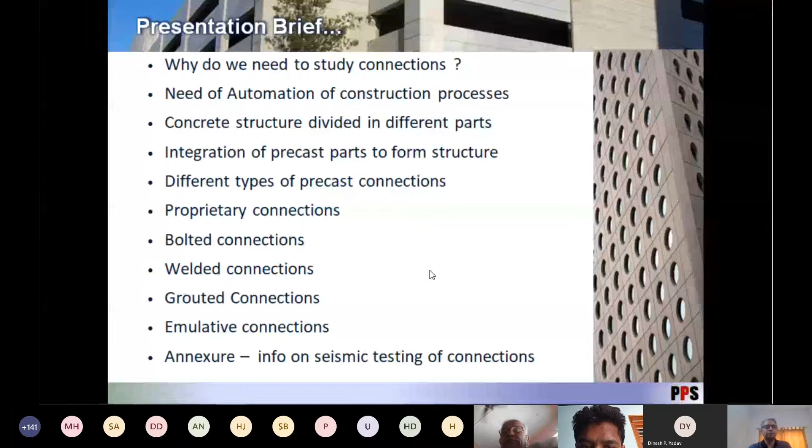This is the first part, like what we were discussing in the beginning: why do we need to study the connections?

If we see, a car is made up of different parts, it's a very well-known example, so I tried to correlate with this, because everybody accepts readily that a car has to be prepared in different parts and then assembled. No single organization can directly create a car, that's a well-known fact. Over this period of 100 years, people have divided the car into different parts and created one assembly line process where all these parts are assembled together, and a car of a special brand comes out of that assembly line production. So in similar fashion, we are dividing this car because it is a very complex product which is very difficult for only one organization to do everything.

Similarly, in case of our building structures, everybody will agree that buildings are also equally complex in nature. Right now, every organization is putting a lot of effort to club all these different aspects together to create a good building structure. The benefits of dividing the building structure into different parts will automatically need some good connections to combine them together once those parts are manufactured at different locations or specialty locations. Some special type of elements will need to be cast separately, say a unit which can cast wall panels, a unit which can cast hollow core slabs, a unit which can cast long line type pre-stressed beams, or a unit which casts precast columns. Assembling all these units together will need some good set of connections, which we are going to study now.

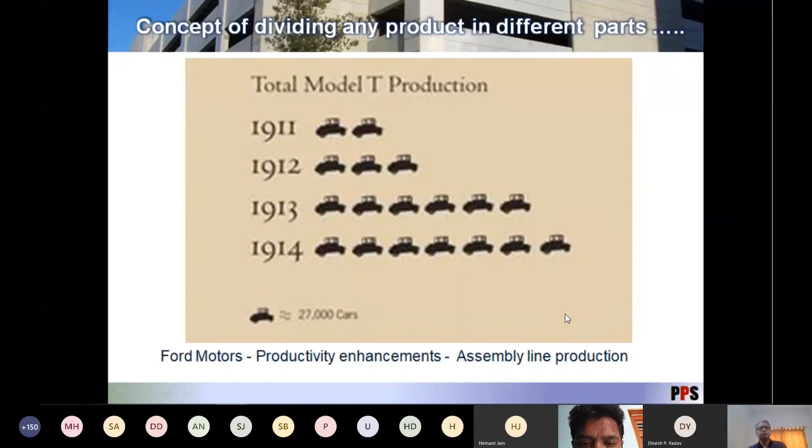So how this goes actually, even in construction, what we have observed mainly is whenever we try to provide any contractor or engineers on site, the obvious choice of a project manager is that they want very skilled manpower. Why skilled manpower? Because in construction, it's not like dealing with only one step.

If we have to do a particular task, we need to complete at least 10 steps. Maybe we can broadly categorize those different steps, and once we complete those 10 steps, that task gets completed. So normally when we deal with low skill workers, they can complete one step, maybe 2 or 3 steps, but completing all 10 steps needs a high skill worker.

And nowadays there is a scarcity of high skill workers. Earlier we used to get very good carpenters and very good masons because they were in that profession right from the beginning. But nowadays, because of changing trades, it's very difficult to get high skilled workers in all the fields for one particular project or building.

So what is the solution in that situation? We should be able to get the work done by low skill workers also. But if we try to give all these 10 steps to a low skill worker, he will definitely fail and will not be able to achieve the final outcome.

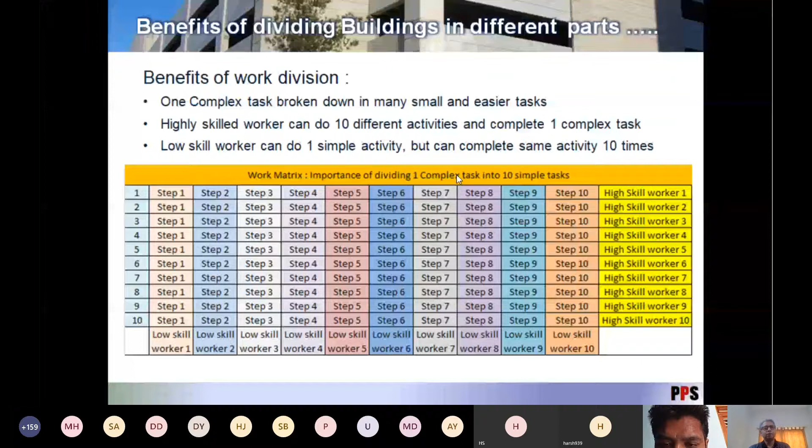Like we also know, in every field we try to do that. In precast, we also try to do that. Everybody need not know everything, because if there are 10 different activities, getting knowledge and expertise in all 10 areas is very difficult. Whereas if we specialize one low skill worker into one special area, then his productivity increases, his output enhances.

So that is how, even in a precast plant, we try to assign different activities. One person is dedicated for mold preparation, another for marking sizes, another for checking the molds, then someone puts the inserts, lifters, and MEP, and then at one station the concreting and curing happens. This way the productivity of low skill workers also gets utilized.

Hello, yes sir, are you able to see this video? Because I am not. Are you able to see the presentation? I am not able to see the red outline. No sir, we are able to see the presentation. Okay fine. No sir, it's not visible, sir. Normally the PPT is not visible, it's all about the internet connection, how it is working. If it's not proper, that is why it may be. Maybe you are using internet via mobile portable hotspot.

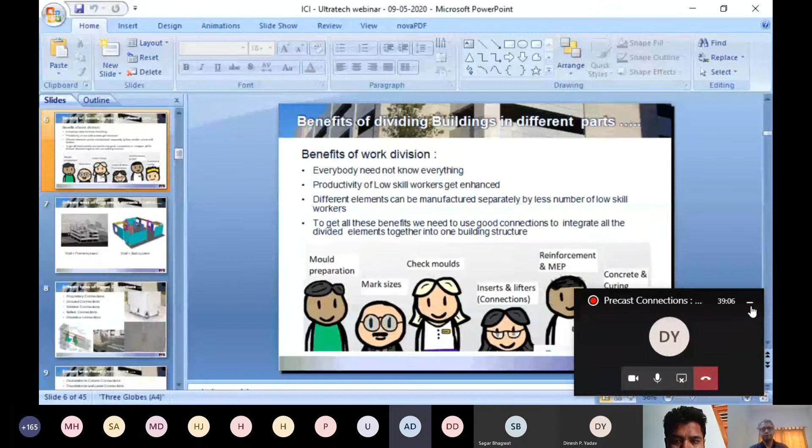So basically, the benefit of dividing work is that everybody need not be specialized in every aspect of the construction process, and we can get the work done with low skilled workers, and then it can be assembled together to make a complete building structure.

Another advantage is that we need not have all the construction activities going on at one place. We can have different construction activities, like different parts getting manufactured at different locations. Some precasting units might have good capability of manufacturing wall panel elements, there could be a different setup for hollow core slabs, and another different setup for column production.

And then all these together can be integrated into one building structure. So there are different structural systems, like how we divide a building structure into different parts. These are broadly categorized, but we can even have some other alternate systems also.

These systems are basically categorized mainly as the wall plus frame system, in which there are structural shear walls. On the left hand side you can see this structure has structural shear walls as well as column-beam frame connections. Sometimes these are moment resisting frame connections, sometimes these are normal gravity connections, and the entire lateral load goes onto the shear walls. So this is one type of system.

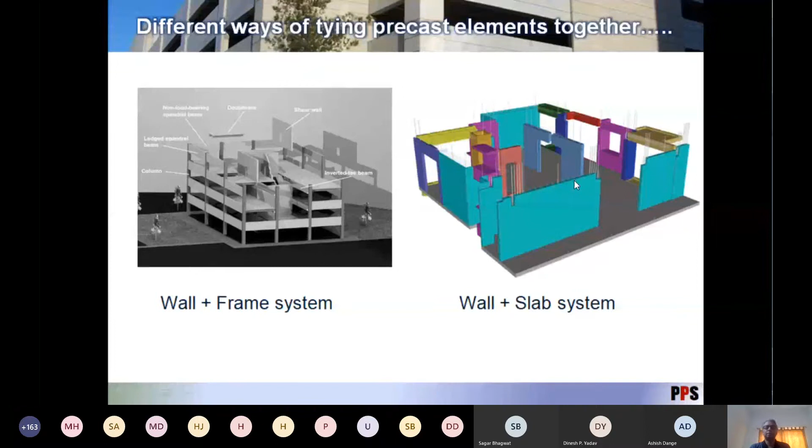If we try to categorize these connections into different categories, it could be some proprietary connections. There are many companies that do a lot of research on the performance of connections, not only from the point of its service life condition, but from the ease of installation, from the ease of getting embedded inside the precast element, and again of course from the service life condition. So all these different types of connections are proprietary connections manufactured by specialists in those connections.

Then there are certain grouted connections wherein we use some sort of sleeves and dowel bars. Can you see this cursor? These are some wall panels which have sleeves embedded inside them, and there are some dowel bars which are protruding out from other type of wall panels. So when these dowel bars are put inside the sleeve and the sleeves are grouted, the connection gets completed.

Similarly, there are welded connections wherein different elements have got different steel parts embedded, either angles or plates, and then with some loose angles or loose plates, these elements are connected together to complete the welded connections. Welded connections need a bit of precise work, because we need to have a different agency for welding on site, and all those welded joints need to be properly checked.

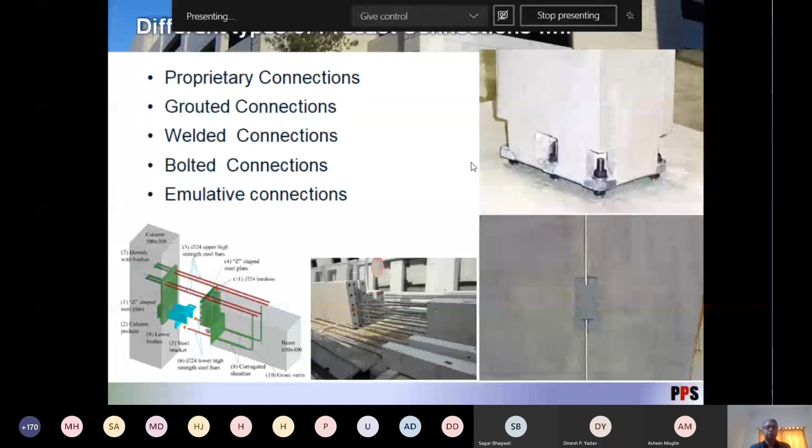These are easier to manufacture, but these are difficult to assemble on site. We need to see the clearances, and we need to have proper tolerances for these elements to get fitted on site.

And then there is another. Hi, hello Dhananjay, Devashish here from Godrej Properties. Hi Devashish. I have a question - among all the types of connections, as of now, which are recognized by Indian standard?

Indian standard specifies... Indian standard has not categorically specified that these proprietary connections are accepted, but all these emulative connections are recognized, and the connections which can be proved by calculations are sufficient to resist the forces at this location. So those connections are accepted, but codes have not specified typically saying these connections are okay.

Like in case of reinforcement continuity connections, there is one code about couplers requirement, and the couplers which satisfy those connections, like Griptec couplers, satisfy Indian codal requirements, so they qualify that codal requirement. But again, that goes into emulative type of connection.

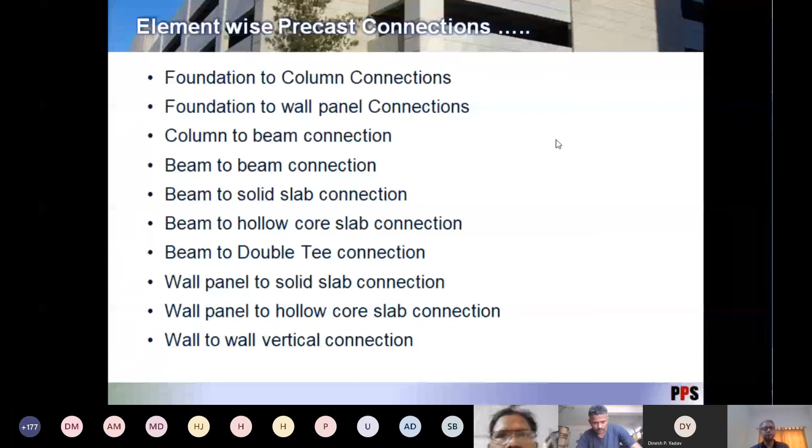So generally people are comfortable classifying the connections in this manner, so we will go like this only. Let us start with the foundation to column connection.

Typically in case of bolted connection, there are templates to be made which can be placed while casting the foundations, so that all these bolts are kept tied to that template, and it ensures that these bolts remain exactly in the same position where they are intended, so that when this precast element, either with these type of column shoes, or...

There are certain base plates in which there are holes kept for bolting of these connections, so either these type of things should exactly get matched with this thing. That is why these type of templates are used. And once these elements are erected in place, then we can always put the bolts and tighten them to complete the connection.

Since there is some space left out at the corners for completing these bolted connections, we can afterwards put some sort of formwork shuttering to complete the bolted connection by pouring the grout, so that these connections don't remain visible. Here is a small video of that, I'll just run that.

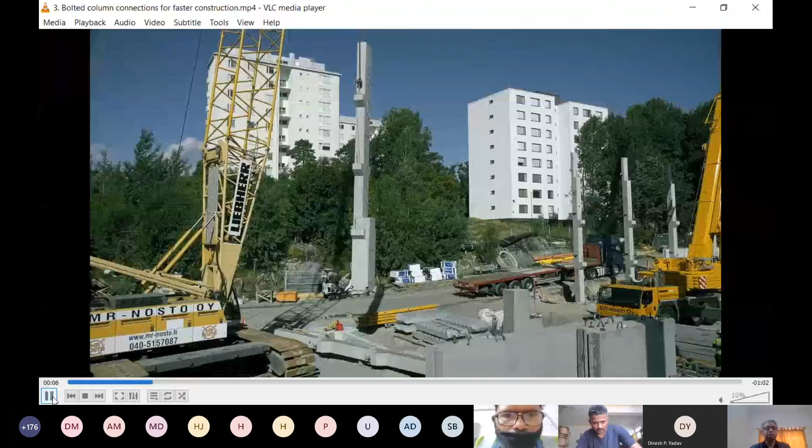This is how the bolted columns look like when they are erected in position. One of the advantages is the speed with which they get erected and the manpower required for erection of these type of things.

There are specialty products available, like Peikko column shoes, which can get embedded inside the column. You can see this column is casted with Peikko column shoes. These shoes typically have got 4 recesses at 4 corners, and then there is a base plate type of thing at the bottom which has got holes from which this bolt can go through, and then it can be tightened like this. Another advantage is it gets installed faster.

At the same time, we don't have to brace it till the time the slab comes on top of this column. So you can see once these columns are installed, they are freestanding. The headache of bracing the columns is also gone.

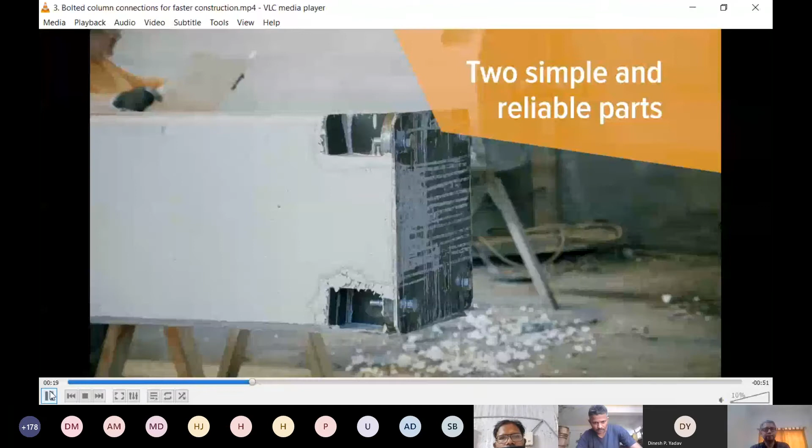This is showing the details of that connection, like how these connections are manufactured. It's like a ready-made product which we insert inside the column at the time of casting, and there are some cavity formers fitted along with this. So after the element gets casted and demolded, we just remove the cavity formers to create this cavity in the columns for making the connections.

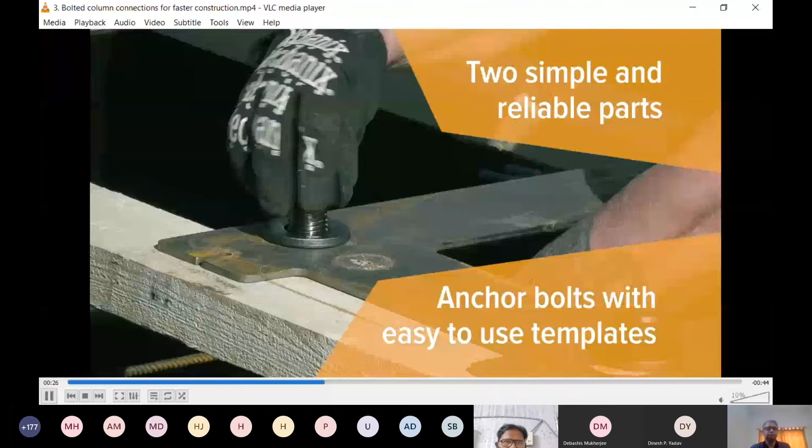There are certain templates to be followed. Here it is shown these templates installed before casting the foundation. Above the level of concreting, cross wooden or steel members are placed on which this template is kept, so the template doesn't shift during the concreting operation, and the bolts remain exactly at the location where they are expected.

So this is how the bolts remain there. The general time required for installing these columns is hardly 10 minutes, which is quite a good time for installation of columns, say a 3-4 storied column.

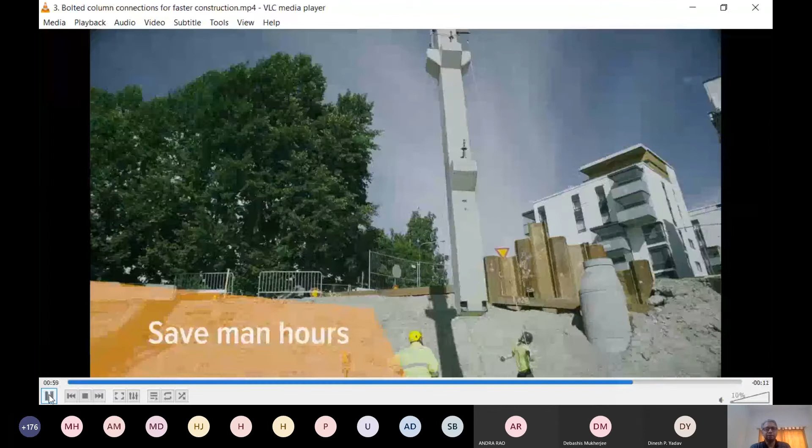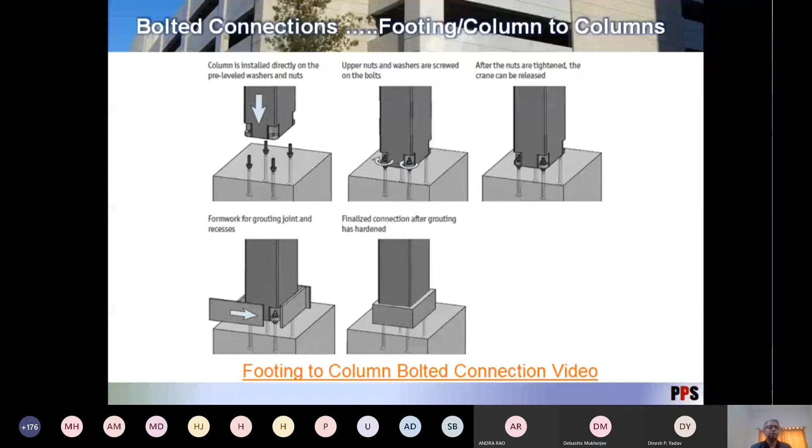Once the columns are ready, installation of beams and other connecting members becomes very easy. The focus of this type of connection is more on saving the man-hours required in erection of the element. So I'm not focusing on the cost part, but the easiness to install those connections and the time saved in achieving those connections at site. Those are also important parameters, and right now nobody has quantified the cost of that. So if we have to do the costing of any connection, these aspects are very important in working out connection cost.

These are some of the benefits you can see in this 3D view. You can see these are the bolts and how they are connected with the base plate to complete the connection. The main advantage is faster installation of columns. We don't need any bracings, which speeds up the construction process. Also, finishing is very easy - we just need to pour grout around it, or pack it with dry pack type applications, in these pockets.

Then there are the same type of connections but with grouted connections. One major disadvantage of grouted connections is we need to have the columns braced till the grout achieves strength. In a grouted connection, we either leave dowel bars coming out from the foundation, and we put sleeves inside the column, or dowel tubes as we call them, for receiving these dowel bars when we erect the column. So once the column is erected, these dowel bars get inside the column, and through these holes we pour a non-shrink grout to make the connection.

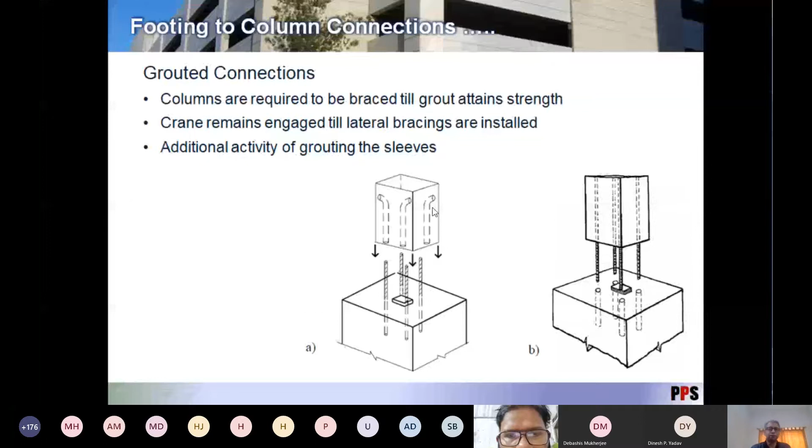They keep these type of pockets inside the foundation, with dowel bars protruding out of the column instead of coming out from the foundation. The advantage is we don't need that much accuracy in casting the foundations, so we can put higher diameter sleeves inside the foundation. While erecting the columns, we need the grouting agency available along with the erection team, because at the time of erection all these pockets need to be grouted first. Once the grout is filled inside the pocket, we erect the columns. So it's possible both ways, but from a functionality point of view, this option is widely used in the Indian context.

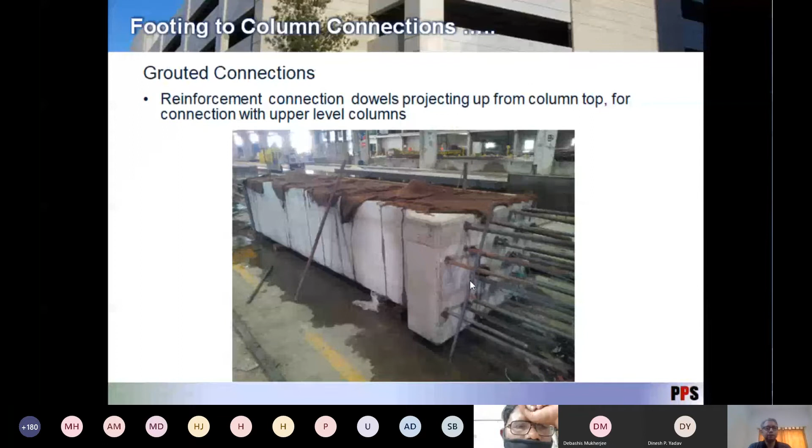These corrugated metal sleeves are at the bottom, where my cursor is pointing right now, and dowel bars are like this. This is a typical type of column cast for grouted connections. Once these columns are installed on site, you can see this is the foundation from where these dowel bars were taken out, and these columns were erected. After erecting the columns, they were braced from the sides like this.

After bracing these columns, the grouting operation was completed. Once the grouting operation of connections was done, upper level columns and hollow core, upper level beams and hollow core slabs were installed. So this is the general procedure of completing this foundation-to-column type of connection.

Then there are different connections available for wall panels also, for precast wall panels getting connected with the foundation. There are certain proprietary connections, like Peikko wall shoes, similar to column shoes. You can see this type of wall shoe, with which there is reinforcement welded to get embedded inside the wall cage. I'll just run one video about this.

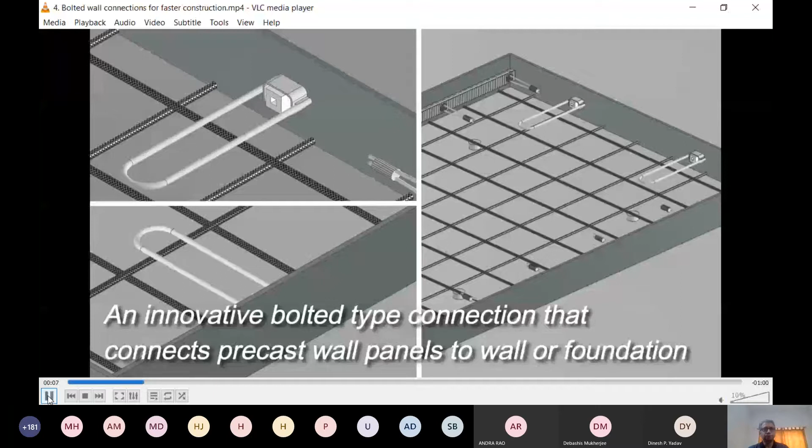This is how, while casting any precast panel, these type of wall shoes are placed here, and there are certain pocket formers which we need to install there, so that during the concreting operation we get some empty space, which can be used for tightening of the bolts. So these pocket formers are placed, and then bolted to the mold.

Once this is bolted, we can put up the reinforcement, and when everything is done, these elements can be shifted to site, and whatever pocket formers we had put are removed for tightening of the bolts. So now once we remove these pocket formers and we shift this wall panel to site...

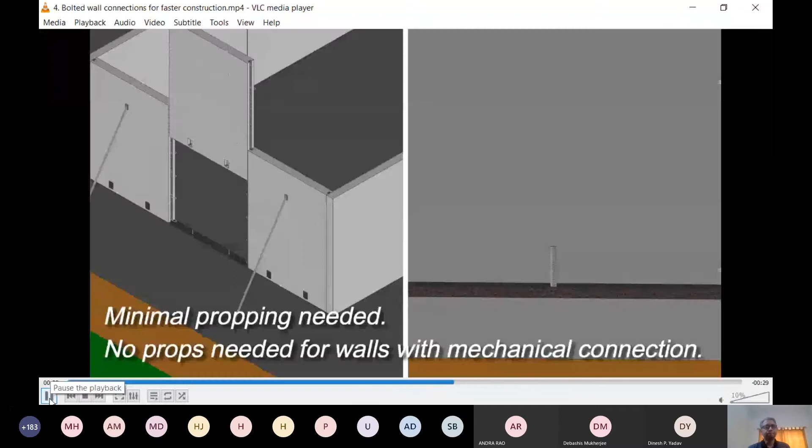After installation of this wall panel at site, we need to provide some sort of lateral support for stability of this wall panel until the slab elements are erected on these wall panels. Once these wall panels are aligned, we just bolt them to finalize the connection. So once the bolting operation is done, the connection is finalized.

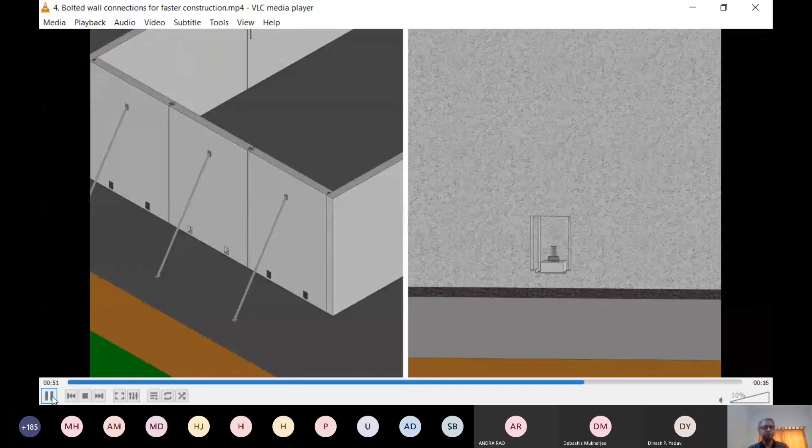Then either we can just use some dry pack grout to finish the connection so that it doesn't remain visible from outside. So this way we don't have to depend on the grouting operation. The connection becomes very fast.

Once we install the wall panel, similar to columns, like the bolted columns that were getting installed within 10 minutes, the same thing we can expect for wall panels also. Here we just need to make 2 connections, so 5 to 10 minutes is good enough for installation of one wall panel.

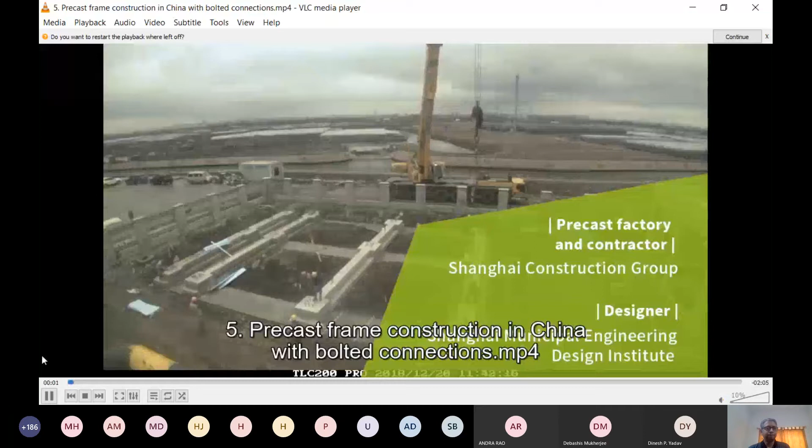Using these type of bolted connections, in China they did an experiment where they monitored the erection time of one precast building, and observed that within 12 days only 8 workers could finish that G+1 type of building. This is a video of that. This building was done using all Peikko connections.

You can see this building was having precast elements like foundations, columns, beams, and facade panels, and everything was done using proprietary connections like Peikko. Here's one important point: if the site is very tightly placed and we don't have sufficient...

...storage place available and we go for these type of proprietary connections, in that case, even without any proper storage, we can directly install. You can see here the trailer is standing here, and they are just picking all these elements directly from the trailer and installing on site.

So we don't need to have proper storage place. It reduces the handling of elements also. Elements can be directly taken from the trailer and installed on site.

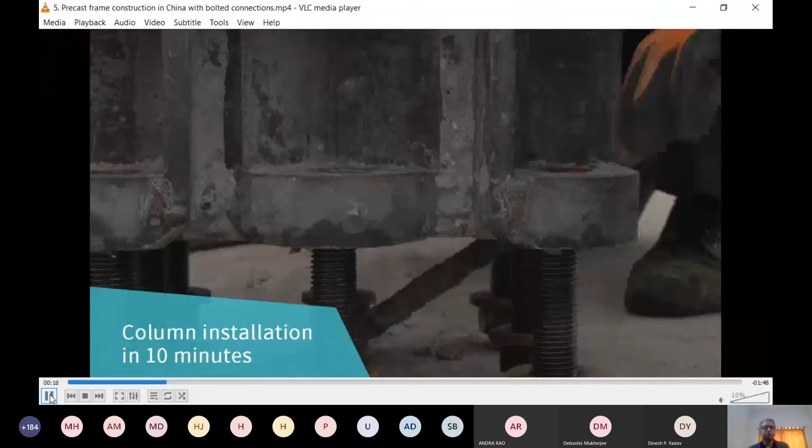And here they have given the timeline, like when the installation process started, and on a CCTV camera they recorded how much time was required for completing the building. Here also the column installation was getting completed within 10 minutes, each column getting installed.

So even the trailer could also wait for that much time because installation is very fast. So it doesn't need to get unloaded. Almost the similar time which is needed for unloading a trailer, in almost the same time these elements were getting erected on site.

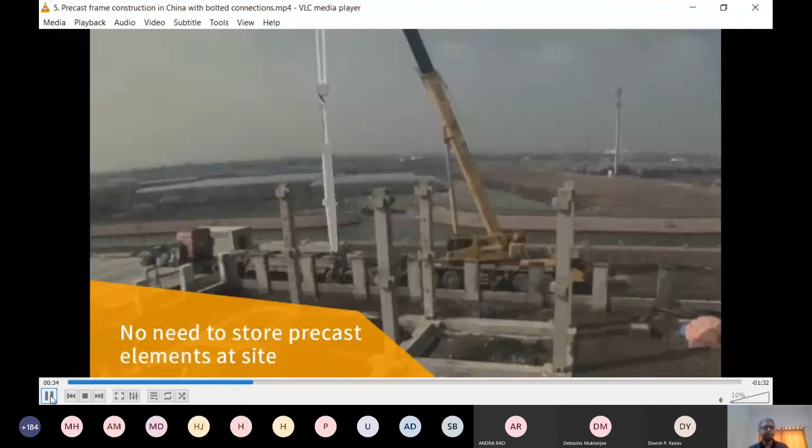So this way, even the crane time also gets saved. In this case, almost 60% of crane time was saved. So if we try to load that time onto the cost of connections, probably that would work out cheaper.

And this is how the other activities are going on. Now they are putting up beams on these corbels.

Since they had used these type of column shoes, they don't need to brace the column temporarily, so they get a lot of working space there, and it increases the efficiency of the workers who are working on site.

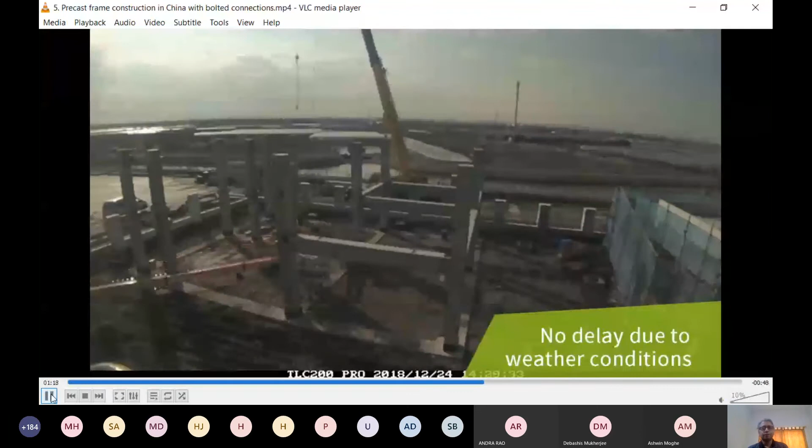And even in any type of weather, these type of connections can be installed. So you can see this first floor is getting completed within hardly 4 to 5 days. There are certain proprietary connections of corbels also, wherein they have got steel corbels put inside the beams for easy installation of the beams. And now the installation of roof slab.

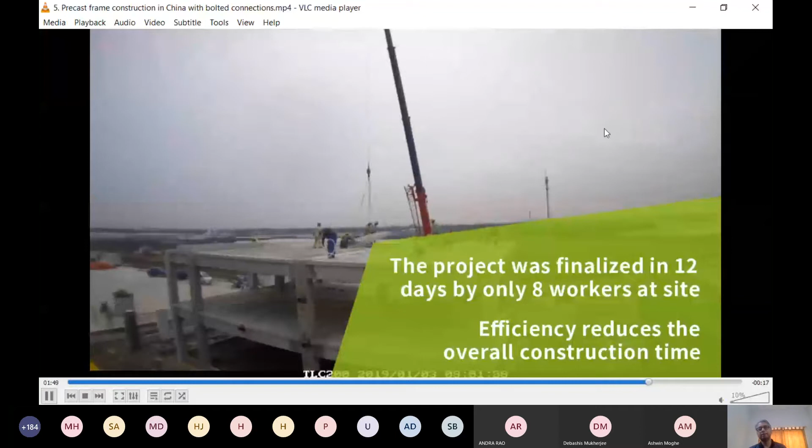So basically they finished installation of all these elements, a G+1 structure building, within 12 days. And if we consider the overheads of site staff and overheads of the cranes and other equipment which get engaged in execution of project, this is one of the very good achievements of bolted connections.

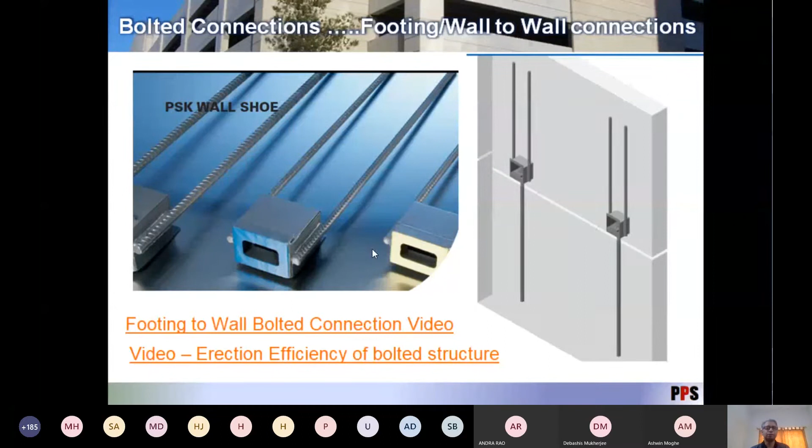Only thing is that while casting these elements, we need to be very precise about the placement of these wall shoes or column shoes, and at the same time at the foundation level also we need to use proper templates to keep the bolts in exact position. That was about the bolted connections. Now we look at the grouted type of connections.

These are commonly used connections at present in India, either a single dowel connection of wall panel, wherein the wall panel has got these type of corrugated metal sleeves and dowel bars are coming out of the foundation walls, stub walls normally we call it. Generally the foundation as well as wall up to ground level, up to the grade slab level, that is done in RCC, so that we can easily align all these dowels which come out of the wall panel, and we get one plain surface for these wall panels to get erected on site.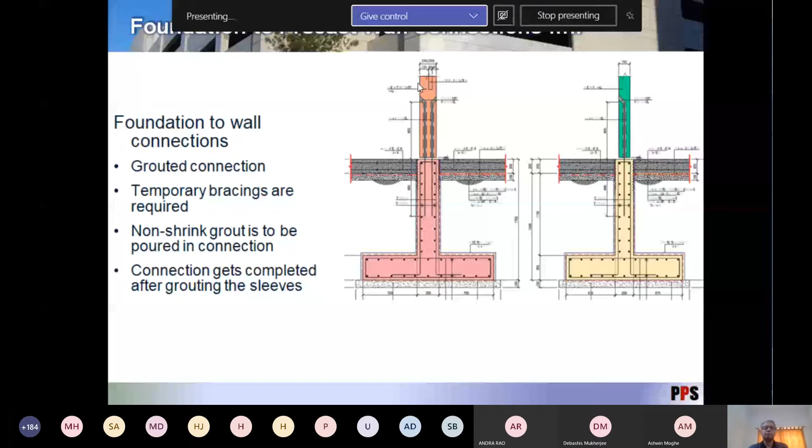So these are called grouted connections because once these dowel bars go inside the corrugated metal sleeves, we pour the non-shrink grout to complete these connections. And we need to provide some temporary bracings to these wall panels till the time the slab elements get erected.

So again, in this case, we need to brace these wall panels the moment they are installed on site. Plus, we need a lot of manpower on site to install these dowel bars, because we need to get all these dowel bars inside the corrugated metal sleeves before lowering these wall panels down. And after the wall panel is erected in position, we align it using push-pull props and then grout the connections.

Now we come to column beam type of connections. These are the general type of column beam connections used in precast. The column beam connections typically have these type of corbels for erection purpose. Many times they are used even for transferring the service load also, like in this case.

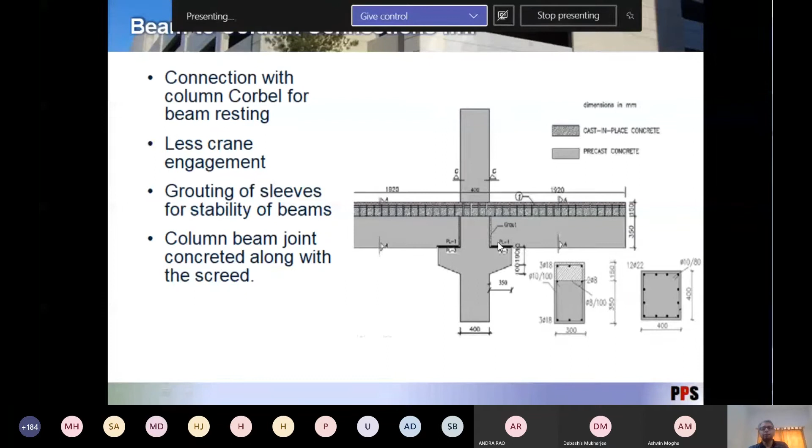But in this type of connection, what we have done is we have taken these beam bottom bars inside the column. So these beam bottom bars also get developed, and inside the screed we put some extra top reinforcement, so we get perfect moment connections here.

So here the purpose of these corbels was to provide basically stability to these beams during erection and avoid the propping of these beams.

Then there are connections like some temporary corbels which are provided like this. You can see this is a steel corbel. This is another steel corbel which is provided below the beam, and these steel corbels are permanent because they are supporting the hollow core slabs in this direction.

This is again one of the tower projects which we are doing in Qatar. There they wanted to have quite higher space available below the beam bottom, so corbels were not allowed from an architectural point of view.

So we provided these type of temporary corbels there in structural steel, and once these beams are installed and the screeding operation is done, then these corbels would be taken out, because the main load transfer is happening through the reinforcement which goes inside the column from these beams.

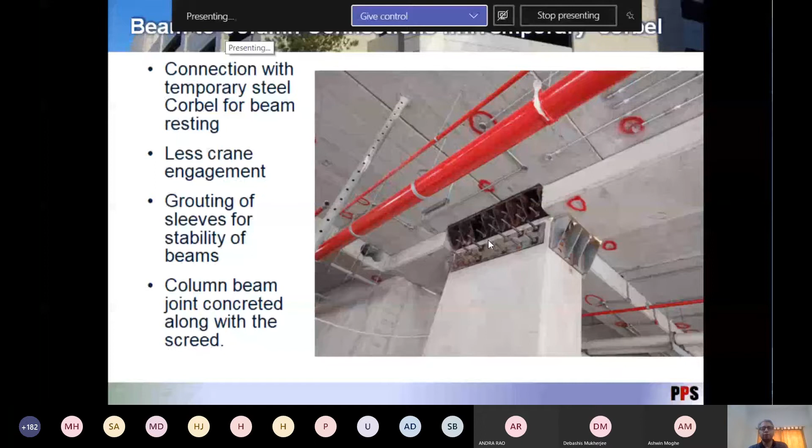And there are certain proprietary connections in this case, but these type of connections are called invisible connections. Normally Halfen-Movement provide these type of invisible connections. The beauty of these connections is that we don't need any type of corbel, either temporary or permanent, coming out from the column to rest the beam.

But another issue is the limitation of this connection: it can only be used as a pin connection. It cannot transfer any moment, because you can see this knife where my arrow is pointing right now. This knife goes inside the column where there is a steel unit placed for receiving this knife. So it mainly transfers only the shear force of this beam into the column. It cannot transfer the moment. So this is called a shear connection.

The advantage again is very less crane engagement. Once the element is lowered into position, we can just pull out the knife which goes inside this column unit. So this happens very quickly, the pinned connection.

This can be specifically very useful in case of circular columns, where we have to connect the beams to the circular columns, and obviously we can't have any type of corbels coming out of a circular column. One reason is that it looks very ugly, another is that the mold becomes very complicated, having a circular shaped column mold plus a corbel coming out of it.

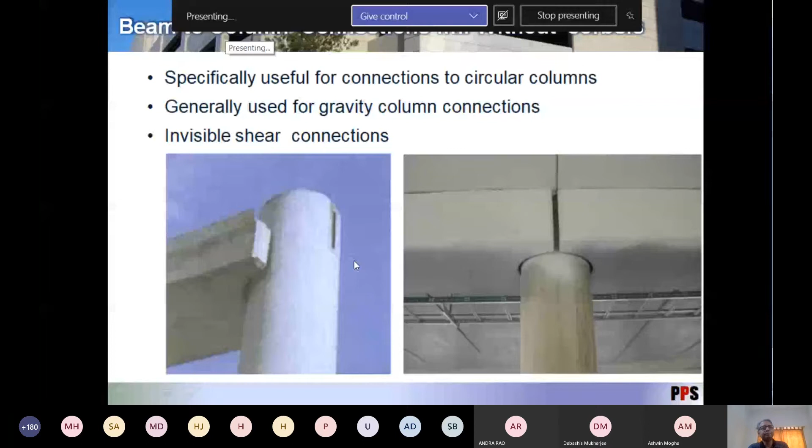Similarly, another pain area in case of precast beam connections is the beam to beam connection. Doing a beam to beam connection is very easy in case of RC members, because we can just take reinforcement of the secondary beam inside the main beam and cast everything together. But when it comes to a precast beam, we need some load transfer mechanism.

Suddenly this thing has disappeared. Is this presentation visible to everybody? That border is not available now. No sir, hello, we are not able to see the presentation. I'll just share it again. I think something happened, and probably somebody else has started presenting something. Can I start this sharing again? Yes sir, yes you can. Okay.

In case of precast beam to beam connection, the main pain area is the corbels, because the beam itself has a very lesser depth, maybe 450 to 500, sometimes 600. So to make a corbel which can take the entire load of the beam, generally loads could be in the range of 10 tons to 50 tons, anything depending on the span. Having that strong corbel which can take up the load of this beam, again this beam also needs to have some corbel. So it becomes a very tedious connection to execute on site. That is why we generally try to avoid beam to beam connections in precast.

But if we use these type of invisible connections, then it becomes very easy to install these things. We can have this knife going inside the beam, and then this connection gets completed very easily. These type of connections can even transfer a shear of around 70 metric ton, which is a very good amount. So mostly it covers almost all types of beam applications in residential and commercial buildings.

Similarly, it is very useful in case of double height or triple height atriums. You can see here these are open frames in an atrium. If we try to put any type of visible connections here, like corbels or any other stuff, then it becomes very difficult to camouflage that with some sort of false ceiling or molding. So it's better to have these type of connections in aesthetically important areas like architectural atriums or those type of situations.

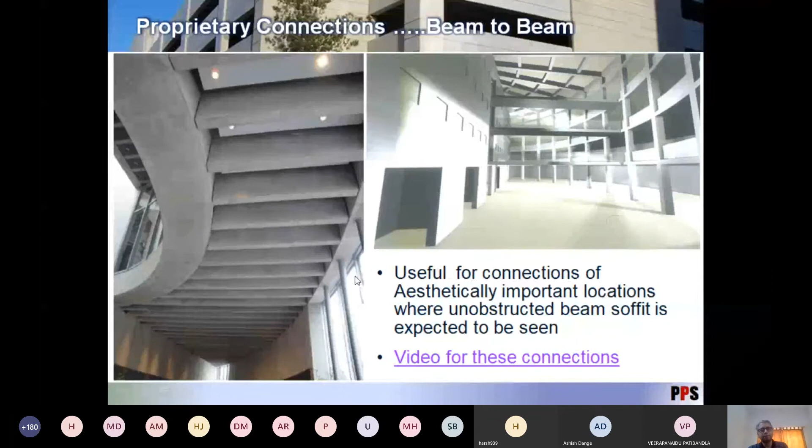Here you can see this is a sort of curved element, and these beams are getting connected using these type of invisible connections. So there is a short video about how these connections get executed on site.

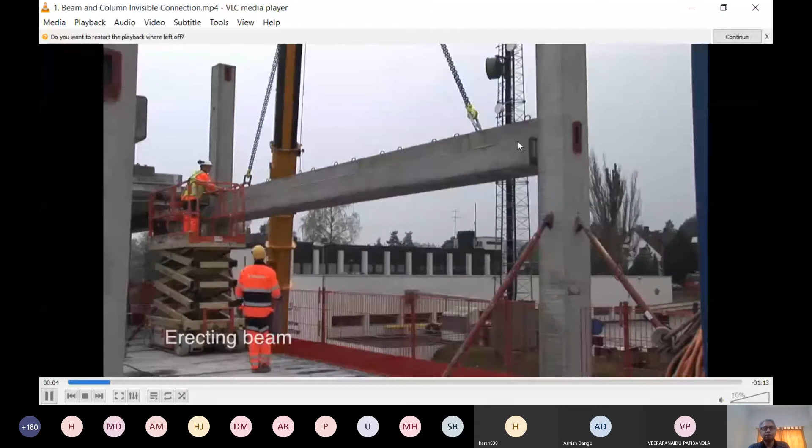You can see this is a beam element which has got that type of knife here, and this is how that knife is taken out. There is some locking mechanism with which this knife is held, and it is ensured that this is fully taken out and the connection is done.

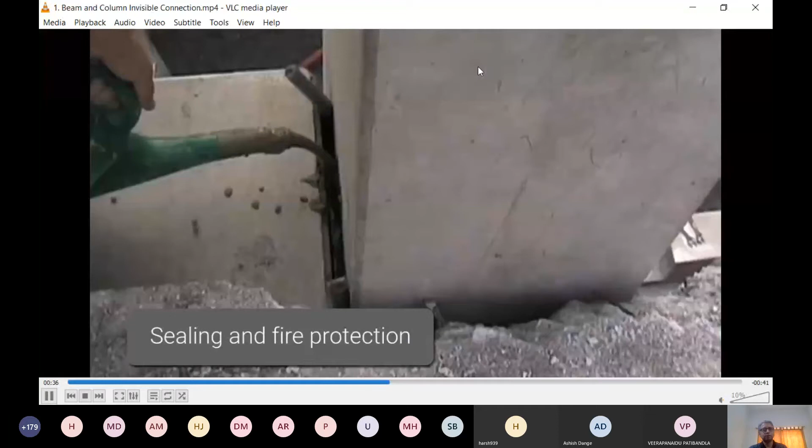Some temporary propping is required till the time this connection activity gets completed. Once that is done, this is required for a sort of fire protection, so they put some backer rod and grout it afterwards so that it doesn't remain exposed to fire.

This is how the connection happens. This is a main beam and this is a secondary beam getting rested on that. The main beam has this type of receiving element, whereas this secondary beam has the knife which goes inside that, and this is how the connection gets completed.

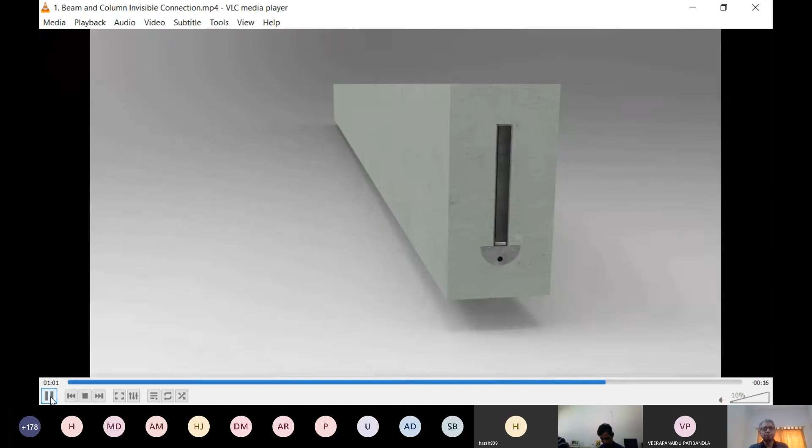Similarly, for any type of beam to beam joint, these type of connections can be used. So this is how these proprietary invisible connections work.

These are the conventional connections I was talking about, like this is the main beam and this is a secondary beam which rests on it. So basically we need to take out corbels from both sides, the main beam also needs to have a corbel as well as the secondary beam also needs to have a corbel. You can see the complicated reinforcement arrangement that goes inside both the corbels. So it becomes very difficult even for the production team to have these type of complicated corbel connections manufactured.

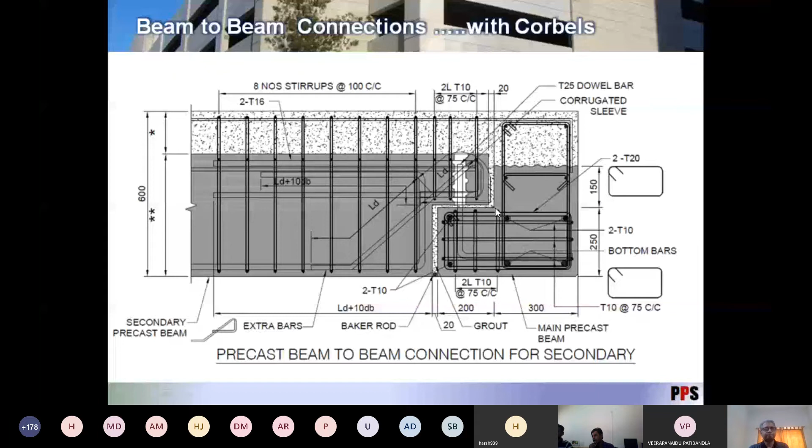One of the important aspects in this is the propping arrangement. If we are able to provide a bearing of a precast element on a beam element or a wall panel element of around 40 mm, then we can avoid the temporary propping; otherwise we need to provide some propping here till the time the screeding operation is completed.

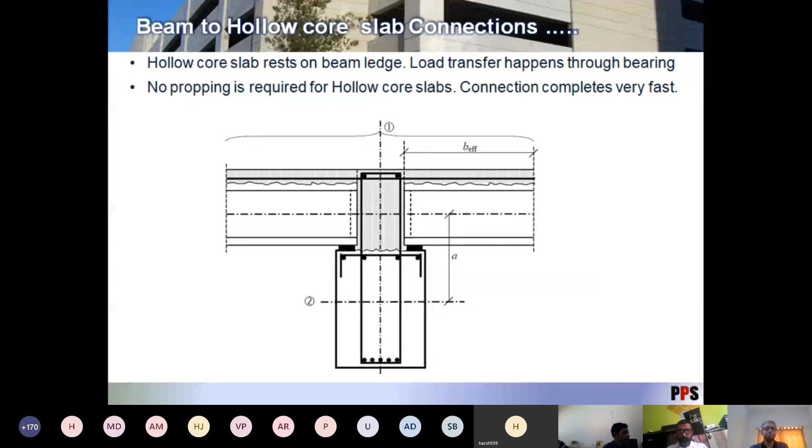The advantage of hollow core slab is that it can span longer distances. It doesn't need any type of propping, and installation becomes very fast compared to solid slabs, because there are standard clamps available for lifting and placing these hollow core slabs. So as of now in slabs, the speed of installation is always highest in case of hollow core slabs.

There is another type of floor element. As we saw, solid slabs are used for smaller spans, hollow core slabs for comparatively larger spans. And in case of very open structures like parking garages, typically in the US a parking garage has a span of around 60 feet, a standard span.

So for that, these double T elements are used, and the connection of these double T elements is like this. This is an inverted T-beam, having these bearing strips or bearing pads kept on the ledges of the inverted T-beam. These double T elements, the stem of the double T either directly sits on it, or if there is a height constraint or the beam depth is not that high, then we provide a small dap at the end of the double T like this. You can see here a dap inside this double T, and this part rests on the ledge of the inverted T beam.

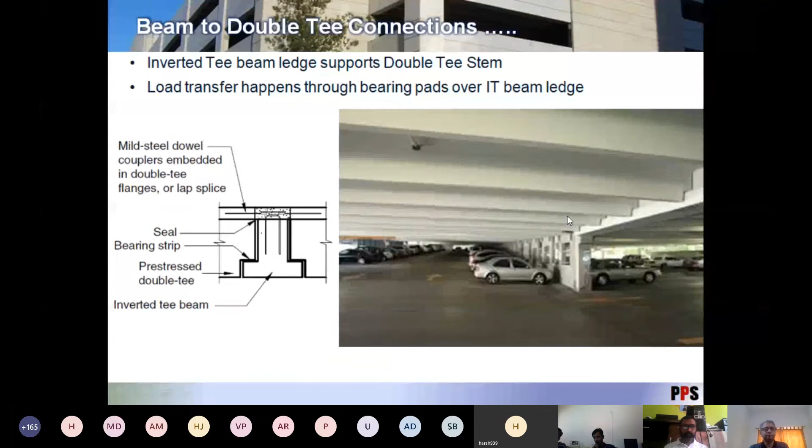These are some of the photographs of one project where we have used double T slabs. You can see here the column to column span was 15 meters, and these were the IT beams, and these double T's were directly resting on the IT beams, the ledges of IT beams. The size of double T element was something 3.5 meter by 15 meter.

So the erection speed was very fast, and in fact it can even take very high loads. These double T's were designed for 15 meter span with a total load including dead load plus live load of 7 kilonewton per meter square.

Shapoorji was the contractor who used these type of connections for resting these double T's. They provided these bearing pads on the contact area on the ledge of these beams, and then the double T's were put on top of that.

So the advantage Shapoorji got in this project was, for the 16 lakh square foot development, they could complete the structural part within 10 months time period. This happened because of the fast connections of double T's and inverted T beams.

Even in this, another project, we have used double T's. This is a data center project where typically the loadings are very high as compared to normal loading. Normal loading in a residential building is somewhere around 2 kilonewton per meter square, whereas in data centers it is 15 kilonewton per meter square.

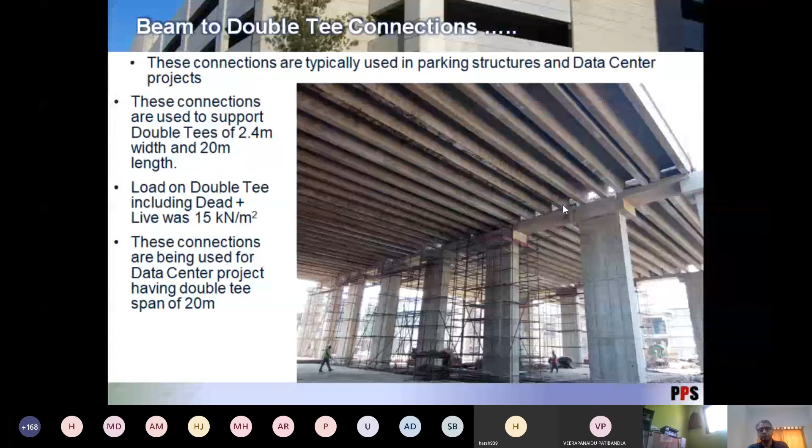Now, apart from floor, there are other important elements like staircase. Staircase is generally one of the major headaches when it comes to construction of any building, be it in any technology, whether RC, structural steel, or precast. The main issue is about the geometry of the staircase, because nothing is in one place.

So obviously, if you have to put some shuttering or make some formwork, everything becomes very critical. The same thing happens in case of precast also, because there are very odd shaped elements, and these odd shaped elements get connected in a very odd fashion.

So the typical connection is to have a sort of corbel inside the walls to rest these landing slabs. But with a corbel coming out of a beam, the reinforcement arrangement becomes very difficult. So the production of that element becomes very difficult, and it doesn't look very good aesthetically either.

So these are some telescopic type of connections similar to what we have seen in the earlier invisible connections. These are TSS type connectors which we place in landings or in flights, which can go inside the pockets in wall panels. There is a small video, I'll just run it.

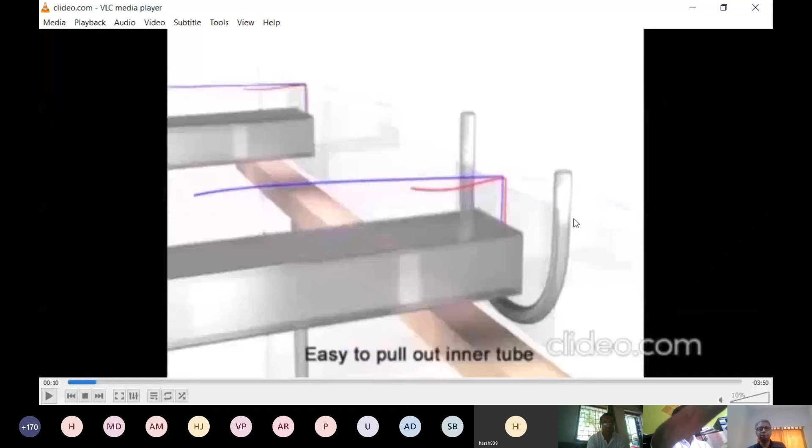Here the purpose of this backer rod is that this part gets embedded inside a precast slab, the landing slab, and this telescopic part comes out of it. So to have fire protection done on this telescopic part which would be visible, we need to grout that part. These backer rods are put in place for easing that grouting operation.

You can see once this element is placed in position, this type of telescopic connection is taken out, and afterwards it is locked by a safety bolt. Once this is put in place, we can do the grouting operation for completing the connection.

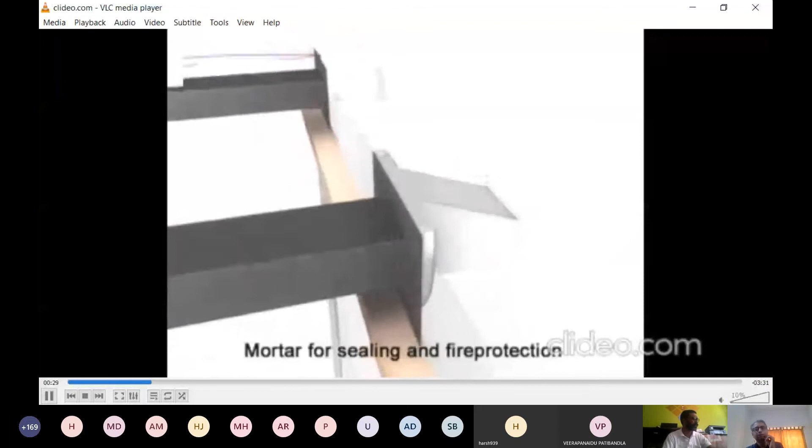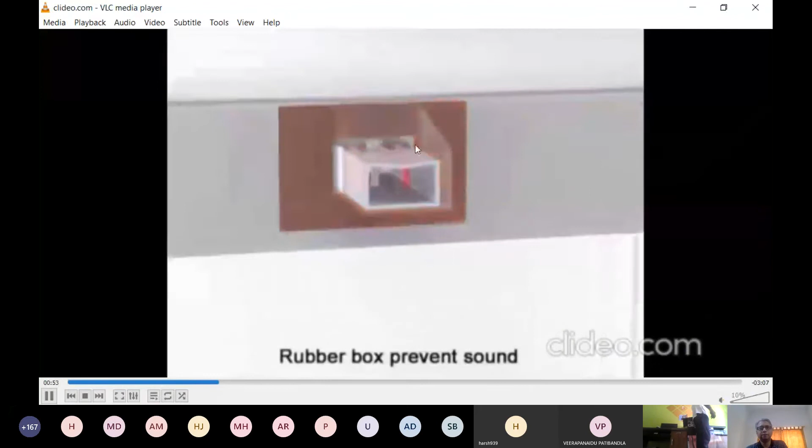The advantage of this type of connection is we can even make these connections such that the vibrations of the staircase don't get transferred to the supporting walls. These are hidden connections, and we can put a rubber type of pad here, a shock absorbing pad on the sides of these connections, so that even if there are shocks...

Typically when people start using the staircases, there are some noises which are heard by people on the other side of the wall. So these type of connections help with that.

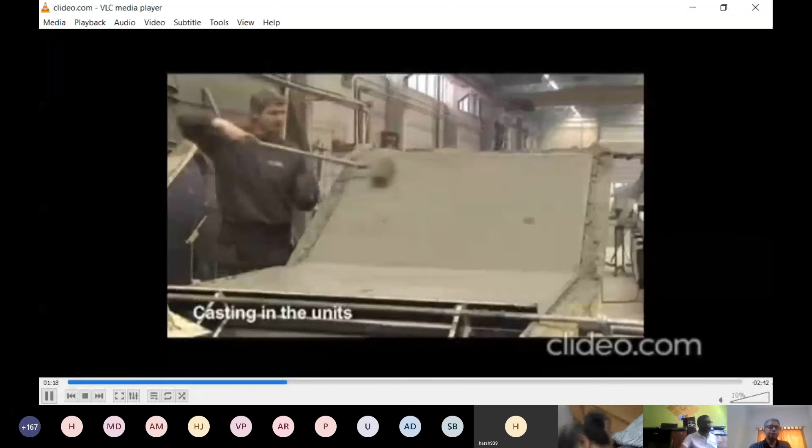This is how the casting operation happens, these connections are getting cast inside. This is some video about how these connections are executed on site.

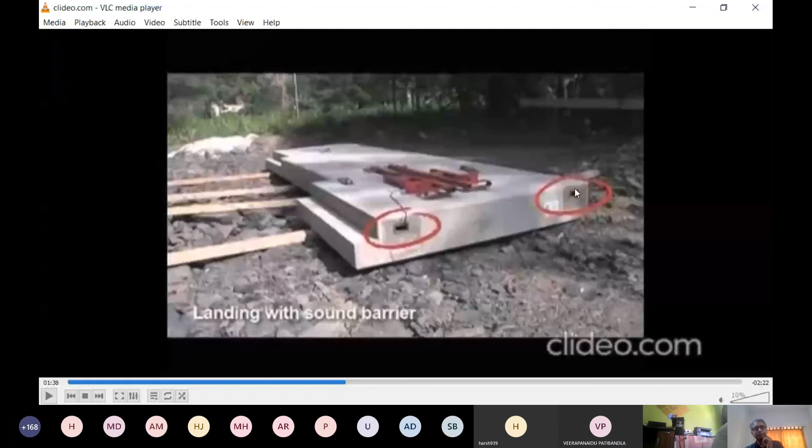Now let us see the installation part of it. This is that landing slab, and here these connections are embedded inside the landing. Once this landing is lowered down, we can take out these connections like this, put the safety bolt, and the connection would get over.

This is how the pockets need to be formed in the supporting wall. And now they are lifting this mid landing part.

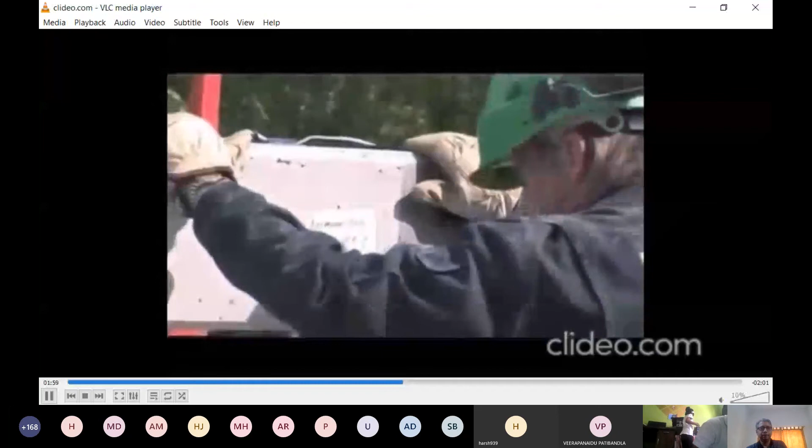Mid landing can be a separate element, or it can be attached with the stair flight. This depends on the type of form used for casting the staircase.

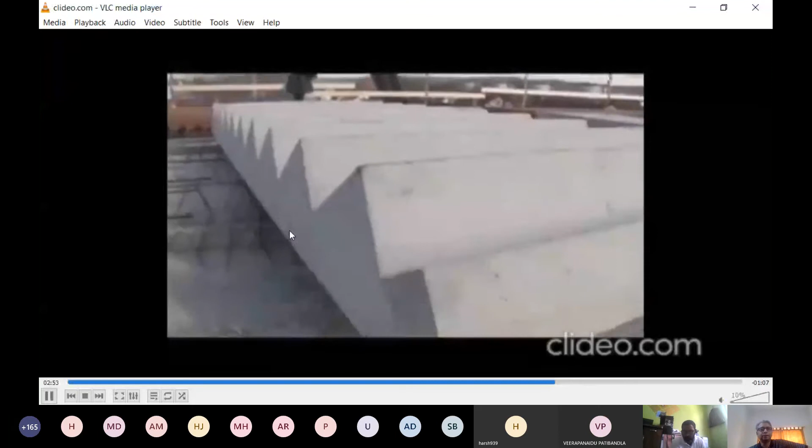Here the mid landing is kept in position, and now they are inserting the backer rods for the grouting operation after the connection is placed. Now they are going to put this safety bolt in position, and they are putting the free flow grout inside this connection. So now this grouting operation is completed. This is how this type of connection can be done.

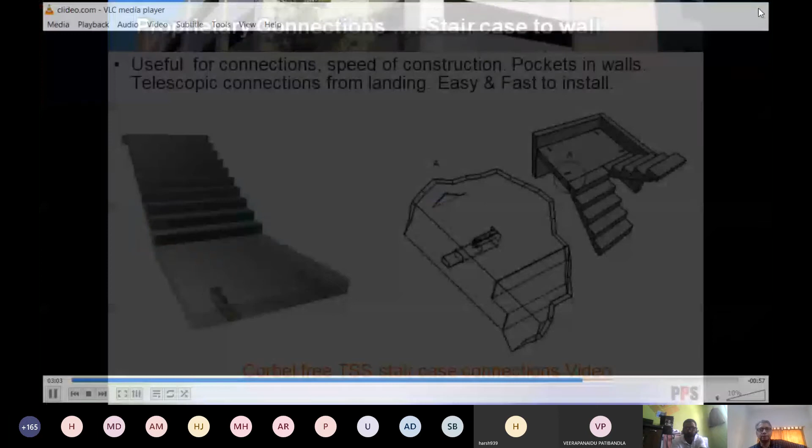This is the same thing which is going to repeat again, so I'll just close this video. This is how these telescopic connections can be used in staircases to avoid any type of corbels.

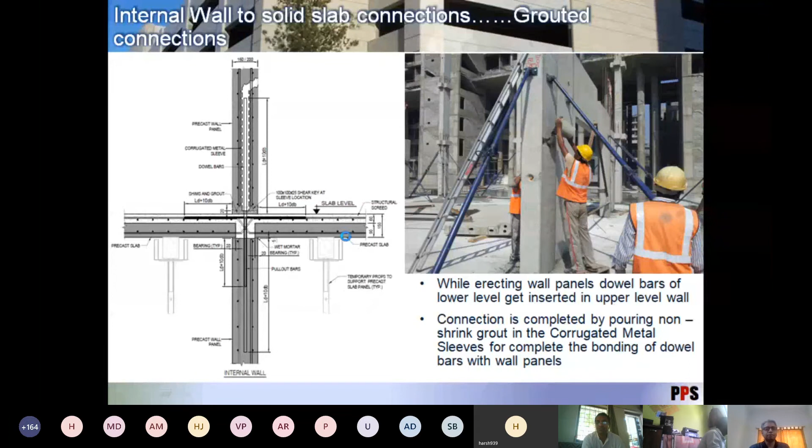This is a case of some internal wall panels where the slab is from both sides. Here we can restrict the wall panel up to the bottom of this slab, but in case of an edge wall panel, for this connection to look better from the external face, we have to take the mold face up to the top of the slab level, top of the screed slab level, so that we can put some backer rod and sealant here to finish this connection. Otherwise, if we stop the wall panel here, we'll see this entire RC band visible from outside, which may not look good.

So here again the same procedure - the only difference is this ledge, which we take up to the slab height. Rest of the things are the same: upper level wall panels are made in position using push-pull props, and once they are aligned, we pour the non-shrink grout to complete this connection.

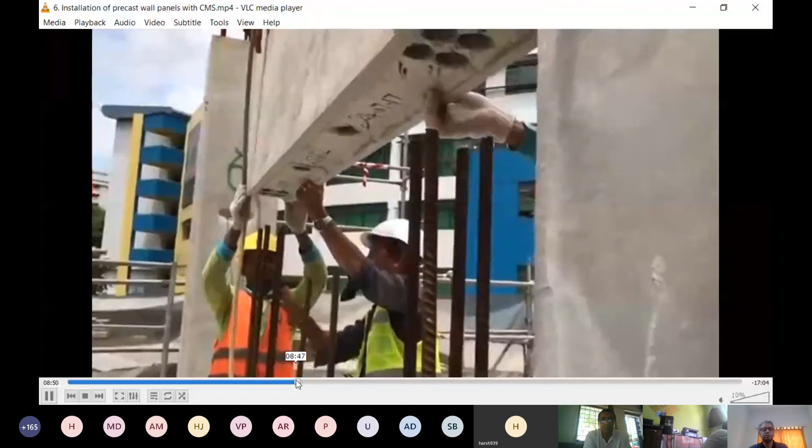From this clip also you can visualize that these type of connections take a long time. They have taken around more than 5-6 minutes just to take the wall panel in position. Now they are lowering the wall panel, but then they realize that some dowels are not aligned, so they will have to align those dowel bars to sleeves so that this connection can be made. You can see the amount of manpower required for establishing this connection - it's like man-to-man marking. Every dowel bar needs to be aligned properly to ensure it goes inside the sleeve.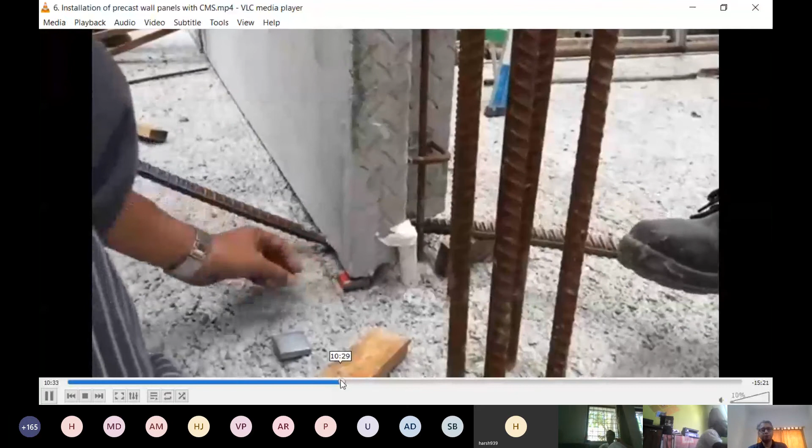You can see once the wall panel is erected, they have to put shims in place. In case of low-rise buildings, we can use shims made of plastic or any other material, but in case of high-rise buildings, we emphasize providing steel shims so there should not be any voids formed inside the wall panels. Once these shims are placed, they have to align it a bit to ensure the plumb and verticality of the wall panels.

Once that operation is done, they install these type of sockets - a threaded socket gets installed inside the wall for fixing the props in position. Many times these people don't have a rebar locator with them, so they do some trial and error - they try to put this thing at one location, and if they hit a reinforcement bar, they shift the location. Once the socket gets installed, they tighten these push-pull props there.

So this is at the top end that the push-pull prop is tightened. Similarly, at the bottom on the slab, they are tightening these push-pull props by having those threaded sockets inserted inside the slabs.

Once these push-pull props are secured in position, they do the aligning part of it by adjusting this push-pull prop. They can align the wall panel. So now they are doing some alignment part of it, verticality checking.

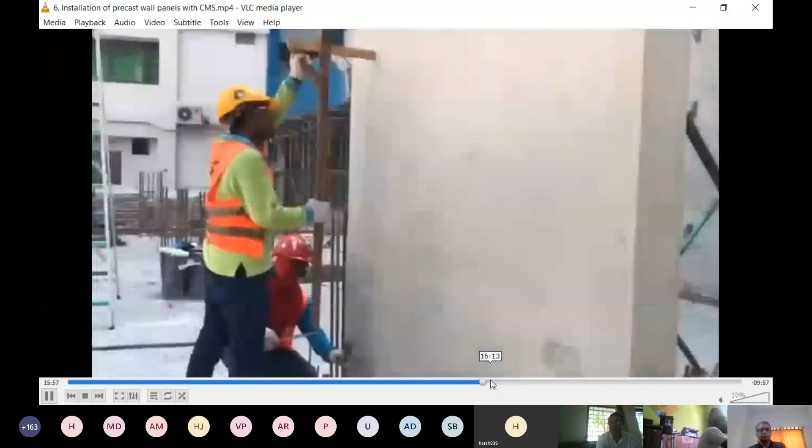There are different methods, like here they are using this type of alignment method. Nowadays they do it using total station. One person stands aside here and points at 2-3 different points of a wall, and guides them to bring it forward or backward by 3-4 mm, and then it's done.

This is how once the wall is ensured in position, they just remove the clutches of the crane. So the crane engagement time is quite high in this case, as the crane has to hold the wall till the time these sides get properly braced.

Then this is how they block the bottom part using a dry pack type of thing, so that during the grouting operation, grout doesn't flow out. And these are the grout holes from where now they are preparing for the grouting operation.

Here they are going to provide the grout, non-shrink grout. Nowadays in India also there are almost all types of grouts available. Like Ultratech also has got grouts like Power Grout, NS1, NS2. Similarly, Conbextra GP2 is there, Sika Grout 214 is there.

So these type of premix grouts are poured from top, and once the holes are completely filled up with grout, they just remove those things.

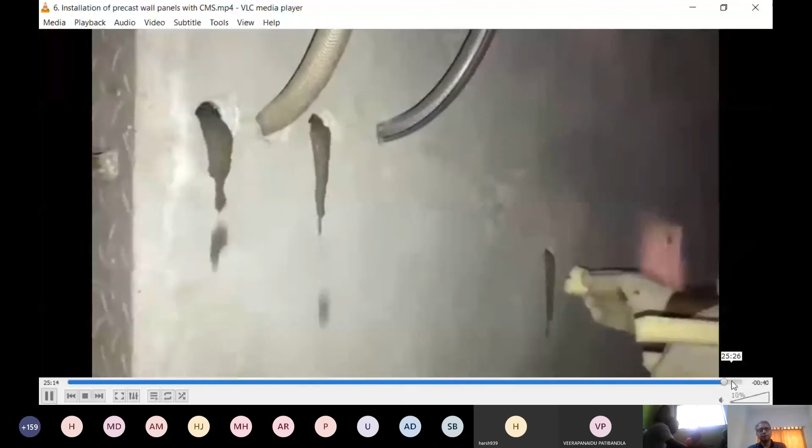So this is how, once the grouting is completed, they just seal those joints. And this is how the wall panel installation gets completed.

Then for reinforcement continuity, there are some ready-made products. These are basically Groutec couplers. These are similar to our normal threaded coupler. What happens in case of a threaded coupler, there is threading on both the bars, as well as the coupler also has got threading, and it gets both bars connected to each other.

But in case of precast, when this element is precast and this element is precast, these bars never come exactly in alignment. So we need to have some tolerance in the coupler. This is provided by these type of Groutec couplers, where one edge is threaded and another edge has got this type of play, and this joint is grouted, so that this bar gets complete grip on this Groutec coupler.

So these type of connections are called Groutec couplers, and nowadays they are also available. The Dextra Groutec couplers are available easily in India. They have done the testing also, whatever we specified for suitability of these couplers with the Indian codes. This is how these couplers are placed inside the wall panels, inside the columns. You can see these small couplers.

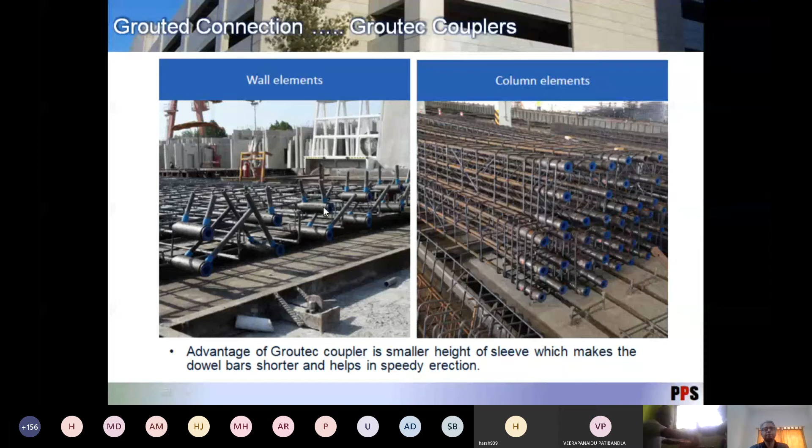The advantage is that, as we have seen in the last slides, in case of corrugated metal sleeves, the reinforcement projection and these sleeve sizes are very high, so erection becomes very difficult. In these type of Groutec couplers, it becomes very easy, as these are very small heights we need to manage during the erection process.

So this is how these connections are kept like this. These are the projecting bars. What we have seen earlier, these bars were protruding out by more than 1 meter, 1.5 meters. Now you can see these bars are coming out hardly 300 to 400 mm in that range. Whereas these are the Groutec couplers from bottom. This is the top of a column, this is the bottom of a column.

And again, for the sideways connections, we have to make some bracings here. Here is a small clip showing how this works. This is one project, I think in Thailand, where they have used these type of Groutec couplers. Even in case of shear walls, they have used it.

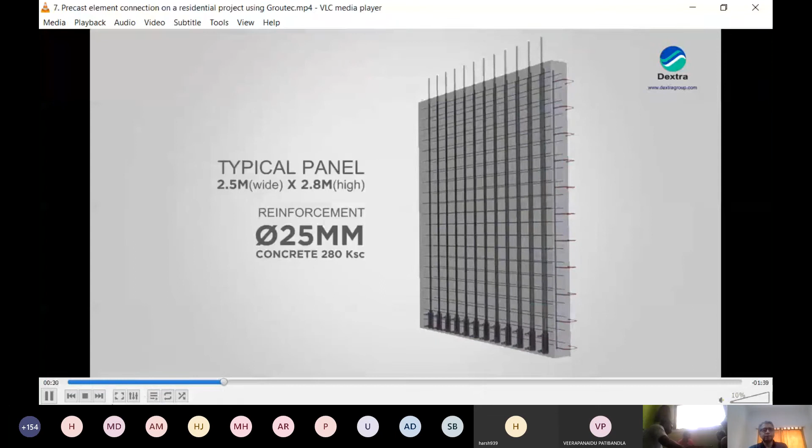From 8 to 38 story, they have used these type of Groutec couplers. This was the design which was used there. You can see 25 dia bars at a spacing of around 300 to 350. They are quite closely spaced, with very high strength concrete.

So you get these type of connections, suited for pressure grouting. This is how the installation of that coupler happens at site.

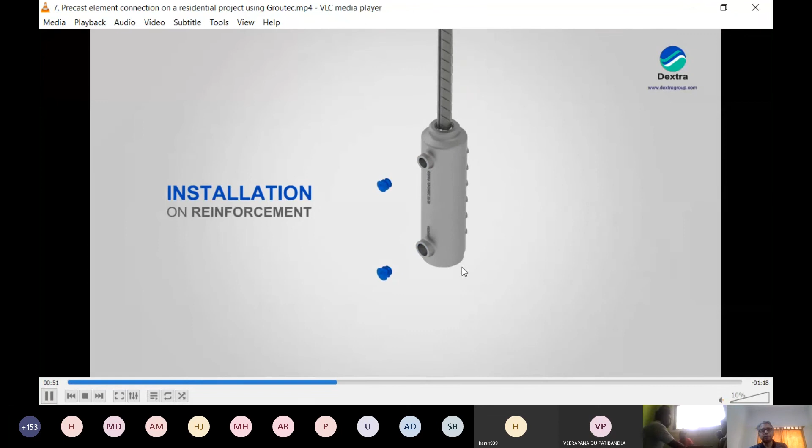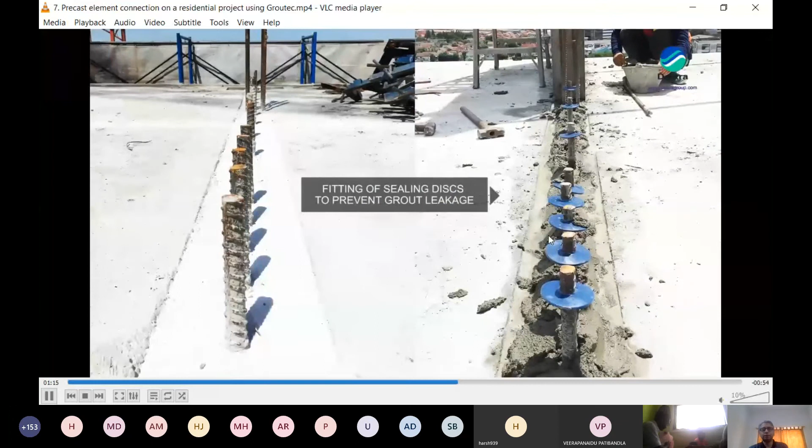There are some bottom seals provided during casting of that element. Here you can see how the couplers are positioned on site, and once the element gets casted, the bottom sealing part is removed, and you can see these are the coupler locations. For installation of the element, you just need to provide a sealing disc so that the grouted material doesn't flow out of the joint.

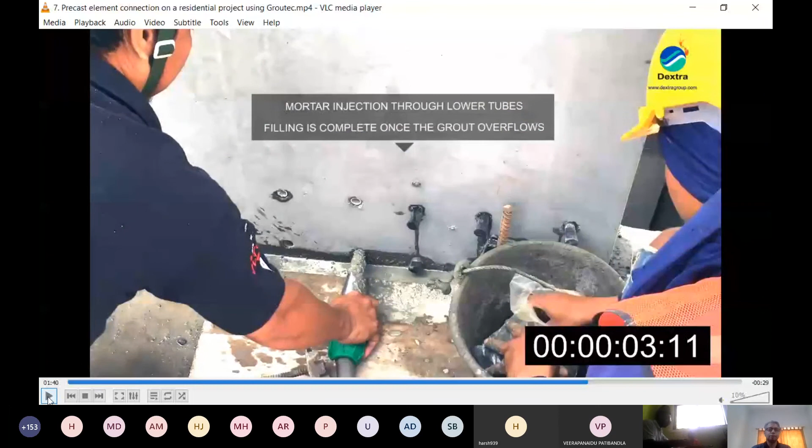Once that is done, these are the grouts. Here the requirement is slightly different. In case of these type of grouted couplers, we need higher strength grouts, like Power Grout NS1, or otherwise Sika Grout 21411. The basic requirement is that the strength of the grout should be more than 65 to 70 MPa.

This is because this connection happens in a very small length, only this much is the length of the connection, so obviously the grout has to be very high strength. Once the pressure grouting is done, they just seal the connection, and that's it. That is how these type of grouted connections are done using grouted couplers.

Another important joint in case of wall panels is the vertical joint of wall panels. We need to judiciously decide at which locations we need brittle connections and at which locations we need ductile connections. Because in case of a shear wall type of building, these connections don't undergo very heavy stresses, since everything is connected like a box through a slab at every level. So these connections may not be subjected to very heavy forces.

So at those locations, we can even go for loop box type connections, which don't contribute much to the seismic resistance of a structure. But in cases where the shear walls are heavily stressed, and where we need these connections to be monolithic, we provide cast-in-situ connections.

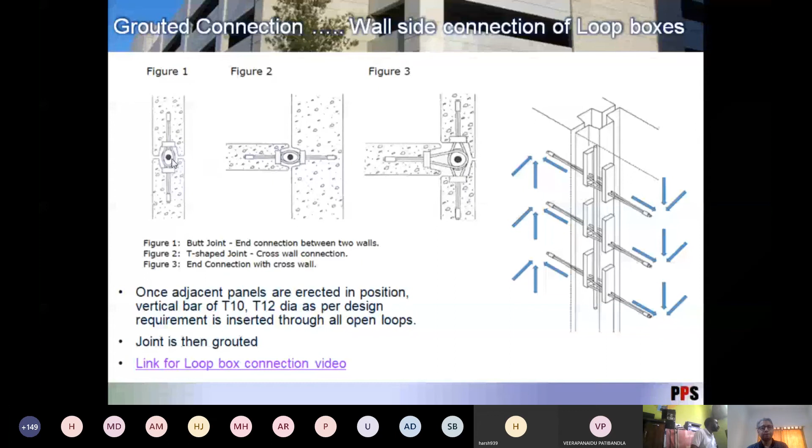Here you can see the installation process. These are the loop boxes which are put inside the wall - this is one wall and this is another wall. These loop boxes are cast inside the wall, and once these loops are put in position, we have to insert one vertical rod like this to complete the connection, and then this joint is grouted to make the connection. There is a small clip to illustrate this.

The advantage is that we don't need to have any stitched-in joint in between. They get installed very fast, and these loop boxes get embedded inside the wall panel during casting of that wall panel element.

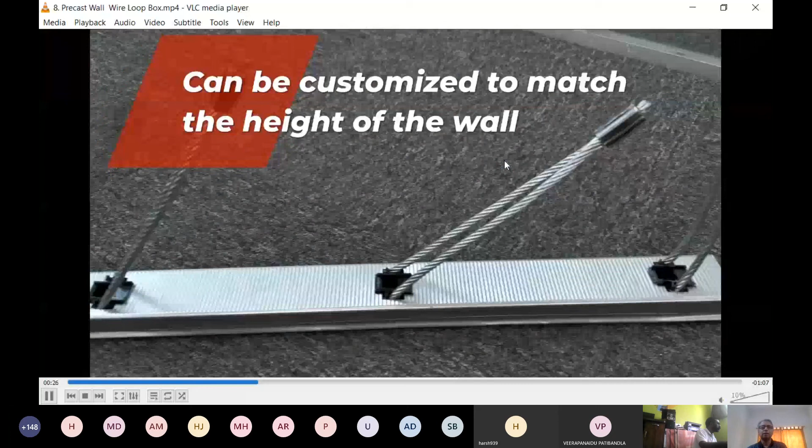This is the back side of that loop which goes inside the wall panel, and this gets attached to the mold like this. After demolding, you get these loops which come out, and they form a connection with the other adjacent elements. So the advantage is that our formwork, the side of this wall panel, remains protected.

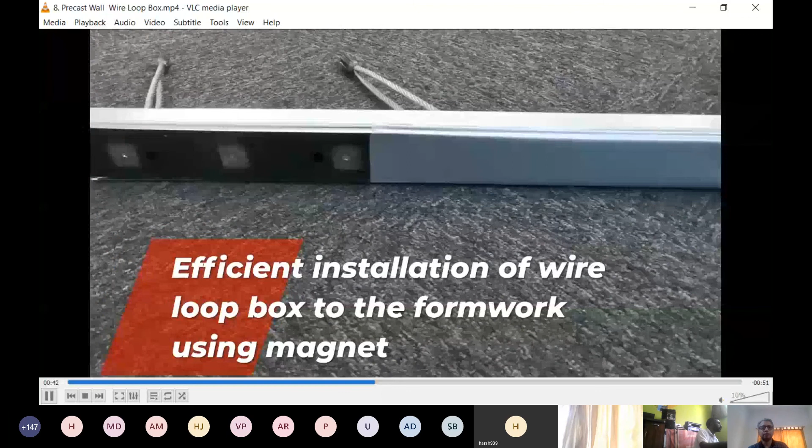We don't need to have any recesses made in the formwork, or any punctures in the formwork for these type of connections, and they are flexible. So while installing two adjacent wall panels, they can be installed like this, and then the reinforcement again. There are certain standards, certain European standards, normally followed for connection of this type of loop boxes, but their performance in dynamic loading is not established.

So they are generally used for static load conditions, and that is why we have to judiciously decide which connections have to contribute in dynamic loading conditions.